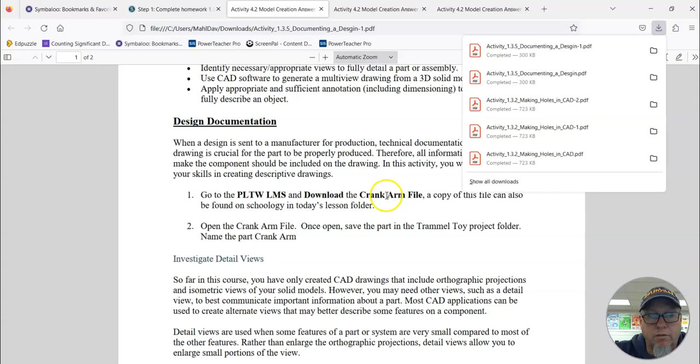We need to get this crank arm file and properly dimension it. And then, once you do that, you're going to have a sheet that looks like this when you're done. So the crank arm file will look like this once you have it completely done. This is what we're going to learn in this assignment, is how to do a detail view. It's not very hard. I'm sure you guys will master it and it will be awesome.

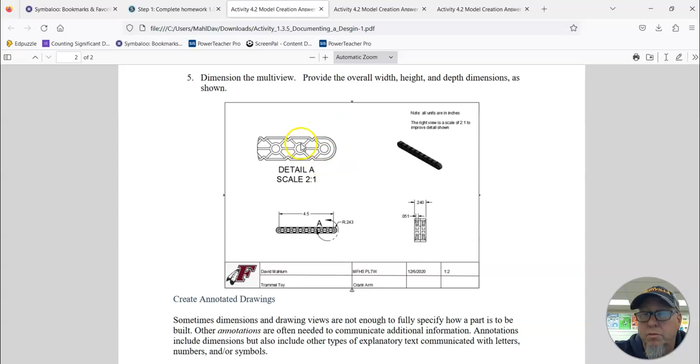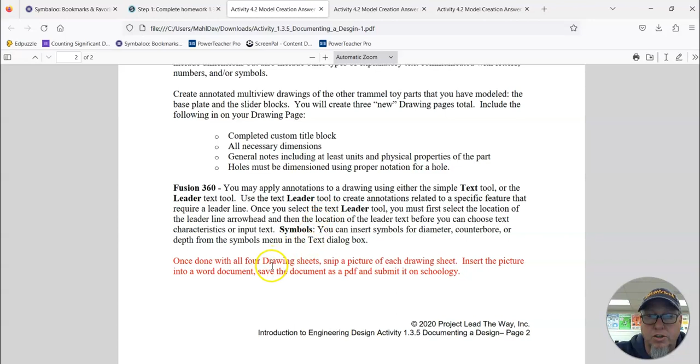This would have been very useful when you were doing your Charmed I'm Sure project, because a lot of you had things you didn't know how to dimension, and the detail view would have been very good for that. But unfortunately, we can't teach everything at once. Also, you are supposed to dimension the pin slider block, the screw slider block, and the Trammel toy base once you're done with this. So I'm just going to get started.

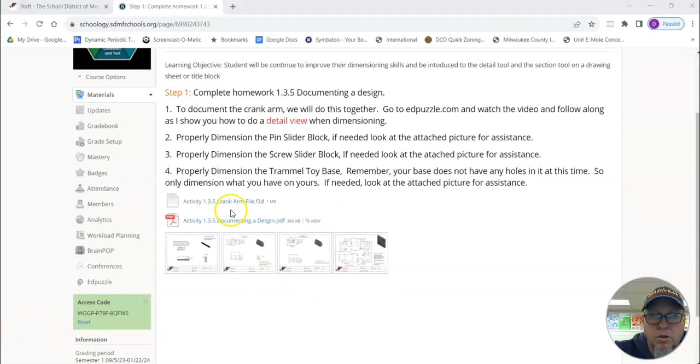I don't need to have the directions out here. I am going to make those directions go away. And to get the crank arm file, that's going to be located right here, and all you got to do is click on that and it will download. So it's right here. I'm going to click, and when it downloads, it goes onto that little download bar at the bottom of the screen. Actually, mine's right up there. So I'm going to open that folder, and I'm going to open that folder right there.

And then once I have this, I'm going to take it out of this folder. I'm going to do a right click and cut it. So I'm going to use the cut tool, or you could use Control and X. So I'm going to cut it, and then I'm going to close this folder. I don't need the folder anymore, so I'm just going to close that. I'm also going to close this window, and this window, and I'm going to right click and paste that file. There it is, right there on my desktop.

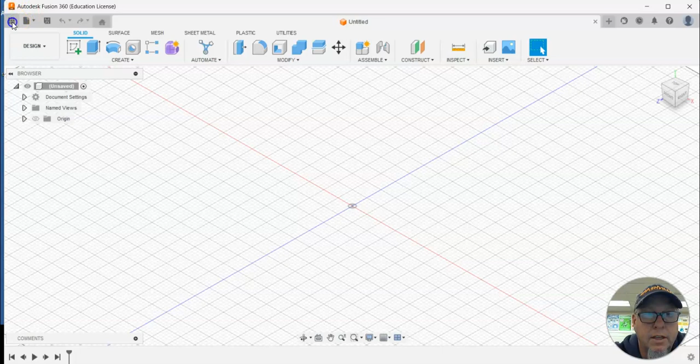And the reason I'm doing that is so that it's easy to find in just one moment once I open Fusion 360. So that is what I'm going to do now. I will pause the video while Fusion 360 opens. Alright, now that Fusion 360 has opened, I am going to go over to the waffle in the upper left, and if things have gone well, you should have a Trammel toy folder project that you've made already. I'm going to make sure that I'm in that folder. As long as I'm in that folder, I should be fine. And then I'm going to open that crank arm.

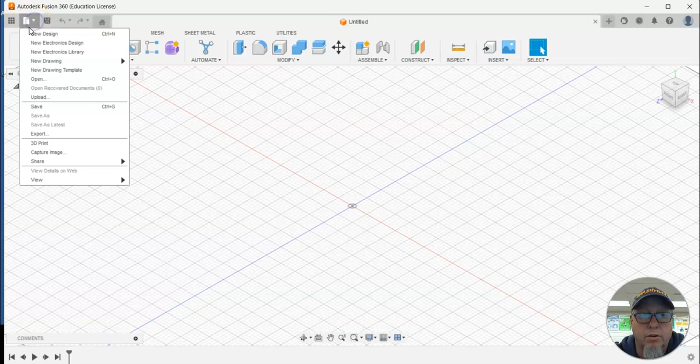So to open it, I'm going to go up to the File menu, click on the little down arrow, go down to Open, click on Open, and I'm going to open from my computer. So when I click from my computer, it's going to ask where it is, and if you put it on the desktop, it's really easy to find. You just click Desktop, and then you're going to scroll down until you find that crank arm file, highlight it, and select Open. This is the only way you should try to bring parts into Fusion 360. Fusion 360 can be glitchy.

If you open the part right off of Schoology, which I know you can do, you can double click on it, it'll open. Sometimes you're going to run into problems when you try to put things together. If you open a part right from a website, which we'll be doing later, we're going to be getting some screws and nuts and bolts and stuff from McMaster-Carr. It's a website that has the PDF files and everything that we need to be able to pull them into Fusion. If you open them right off of the website, you're going to run into issues. You have to download them onto your computer.

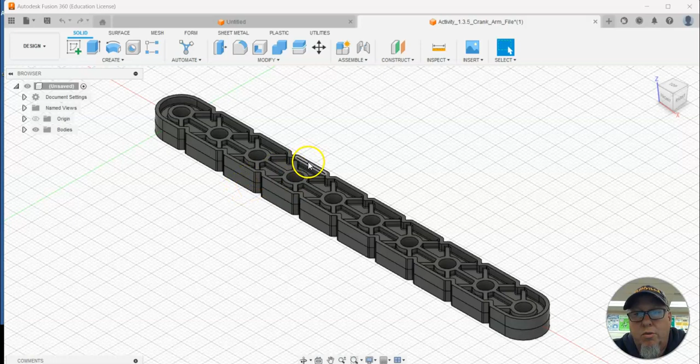I always copy them to my desktop. You don't have to do that as long as you know where your download folder is. I just copy them to my desktop right away because that's just easier to find them later. And then you open Fusion and import them by doing what I just did. So once you're here, you have the crank arm. There's nothing else. This is not a part that you have to make.

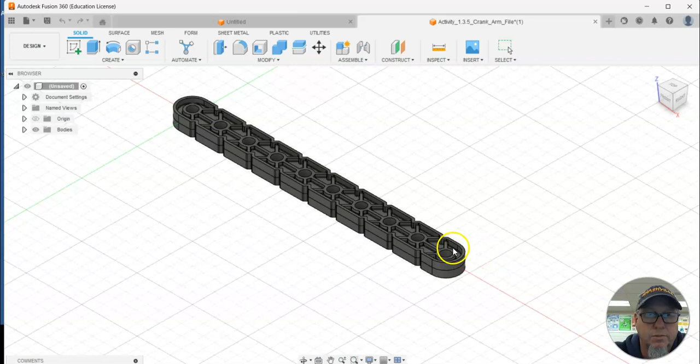So I'm just going to make sure that I save this because I need it later when I put my Trammel toy together. So I'm going to save, and it's already called crank. I'm just going to call it crank arm though, just to make it easier to find it later. It's going into the Trammel toy folder, and it is saved. Okay. Under File, New Drawing, From Design, click. I want to make sure that I use my project lead the way title block that I made for this class, and I'm going to say OK.

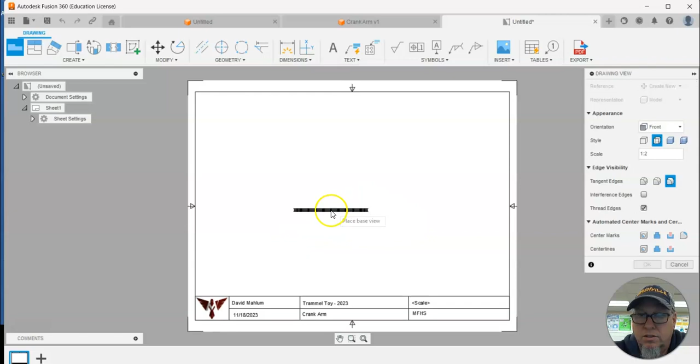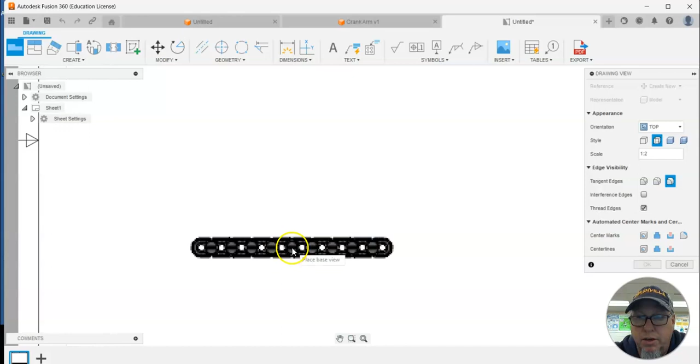Once you do that, you want to make sure that you have the best front view possible, and I do believe that once this starts, when it comes in, that is not the best front view possible. So there's a couple of ways we could change it. We could go back to our original document and switch that up, or right over here I can select a different view, and that is a much better view to put in as my front view than what the front view was. So I'm going to drop that one in there.

It says it's the top. The scale could probably be a little bit better. I'm going to go 1:1 for scale. That seems reasonable, and I hit enter, and there is my base. Nobody knows that this was the top view at this point because we've learned that engineers have a way of doing things, and if you put it in this part of the document, that means that this is the front view.

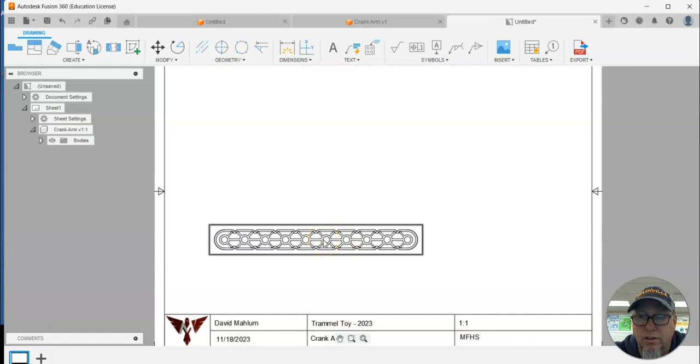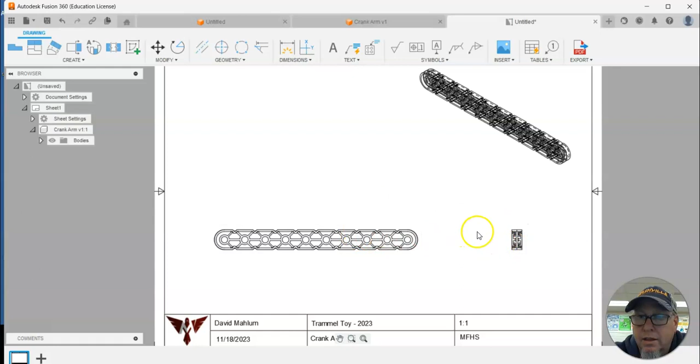If I right click, project view, click, select my base, I'm going to make one over there, and I'm going to make the isometric up here. That looks great. And I'm not doing a top view because there's no information that can be gained from that. I am going to double click here and make sure that that one is shaded because that just looks a lot nicer. I am going to double click here and change that one to 2:1. Just so it's a little bit bigger. It's kind of almost like doing a real cheap version of a detail view when I do that.

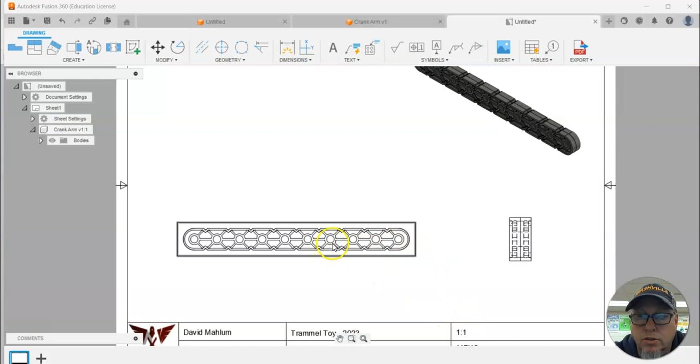Okay, so the only thing that I do have left to do is to show you the detail view. It's this icon right up here. It's got the little A with a circle around it. When I click it, I have to select the view I want to detail, and I want to detail this view. So I'm going to click it, and now I have to choose the center point. So I'm going to go right here. I can choose anywhere. I could choose here. I could choose here. It doesn't have to be the center of a circle. I happen to be choosing the center of a circle.

You don't have to. But I'm going to click and then drag my mouse. I'm not holding the button down. All I did was click. And when I drag my mouse, that circle gets bigger. So whatever is inside of the circle is going to be what gets detail viewed. I'm going to do that one more time. So I'm going to go up and I'm going to select the detail view. I'm going to click the view I want, this view. And I don't have to click the center of that circle. I'm going to go off of it this time just because.

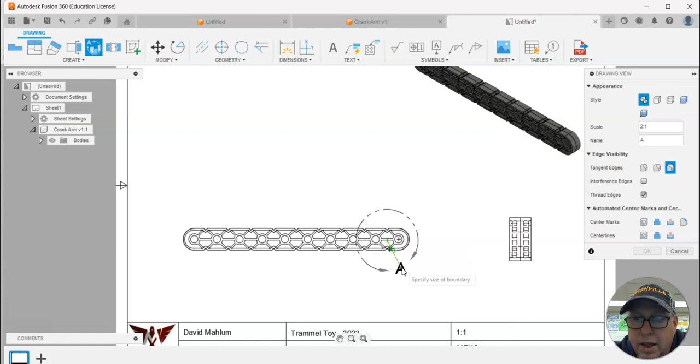Click. And now I drag my mouse. I'm not holding the button. I just click and drag. And then once I have that boundary, I'm going to click one more time. And now I can drag that around. I'm again not holding the button. I clicked it, and I'm going to place it right here. Place. So I now have a detail view. It says it's 2:1. I'm going to hit OK, and there we go. This is my scaled detail view. That's 2:1 from that spot right there.

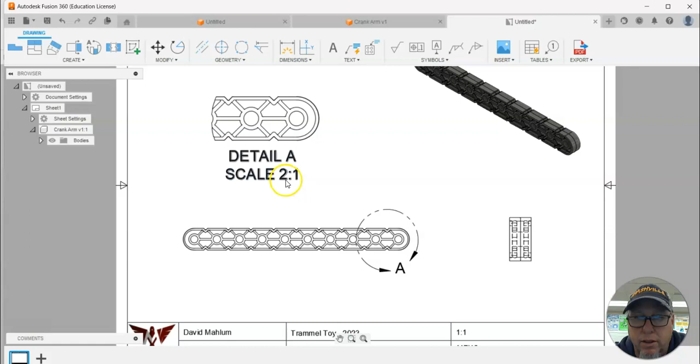If I want to, I can change that scale to be 3:1, and it'll be even bigger. And then I can really get in there and dimension some things specifically. According to the directions here, we're supposed to put a note on this page and detail a couple of things. So let's just dimension the couple of things we're supposed to. It looks like according to the page, you're supposed to go from that end to that end, which was 4.5. Boom. It wants you to dimension a radius, so I'm going to click there and drag that out.

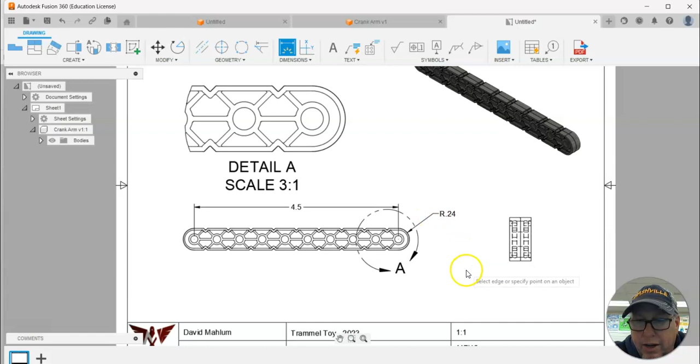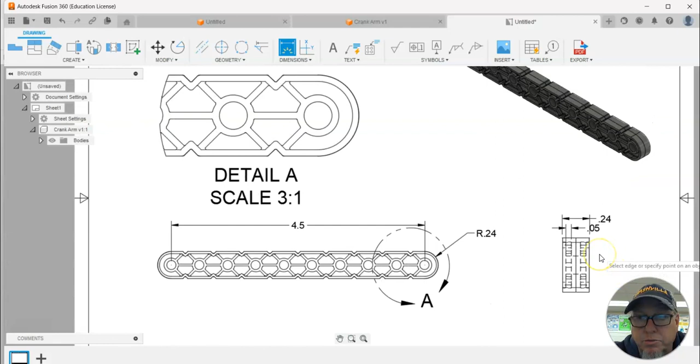There's my radius. You're supposed to do some real simple dimensioning in here, like from here to here, which is 0.05. And then the overall on that side from here to here is 0.24. I'm just looking at the page next to me here.

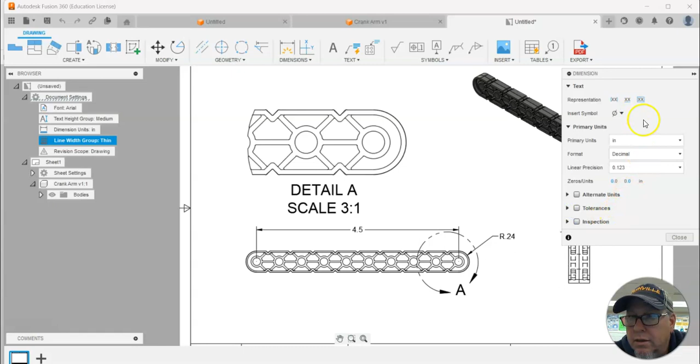One more item. We can get some more decimal points in here if you want. To do that, all you need to do is click on the number. I double clicked on it and it opens up this menu. If we say we want more decimal points, you can hit more decimal points and it'll put them in. So I want that to go to 3 places, and then it will show it to 3 places when we do it. There. I didn't put the 0 in there, that's fine.

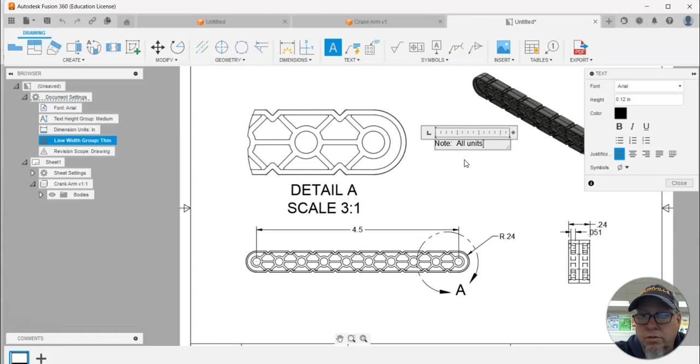To add the note, it's just a text box. I'm going to drop the note in right here. Oops, that got really big. Note, and I'm just going to say note, all units are in inches. The right view is scaled at 2 to 1 to improve

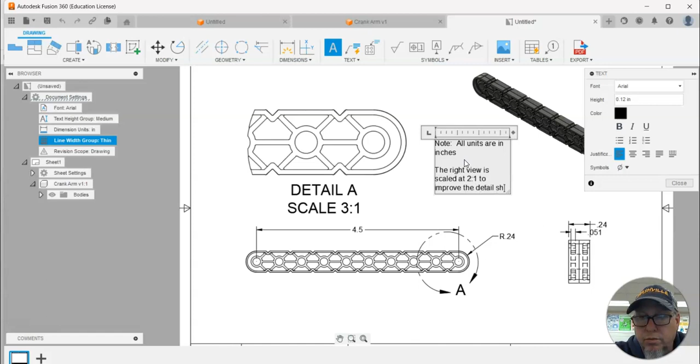the detail shown. And the reason that I'm putting that note in there the way that it is, so I might put that over here, is because normally when you make a sheet like this, and I'm actually going to put it right up there where it is in the other one, you want all of the views to be at the same scale. And this is 1 to 1, which is why it says 1 to 1 right down there. But because I changed this one to 2 to 1, I want to make sure I indicate that somehow.

And that's your crank arm file. That's one of the things that you'll be able to snip a picture of and turn in on Schoology once you're done with all 4 of them.